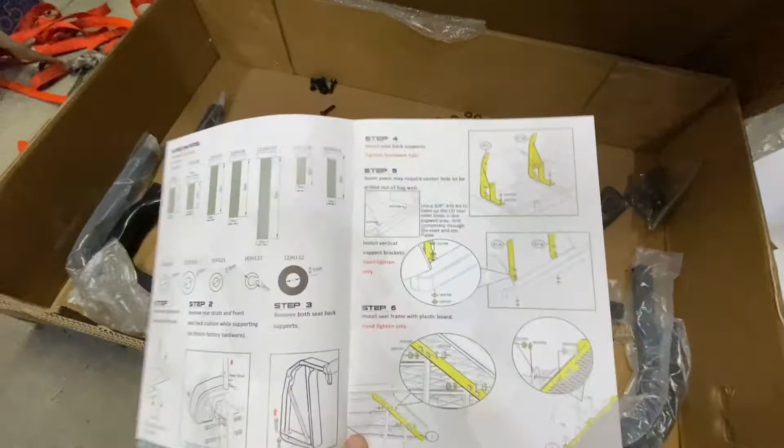Well, I'm far enough along sorting through all the bolts that were laying in the box and can at least get started on putting the rear seat kit on. So I went through the checklist of hardware and got them sorted into piles. There's a couple extra of some that don't even match what's on the chart.

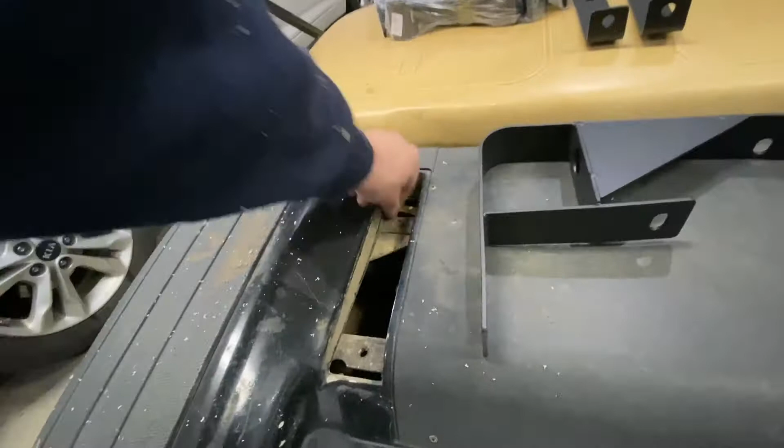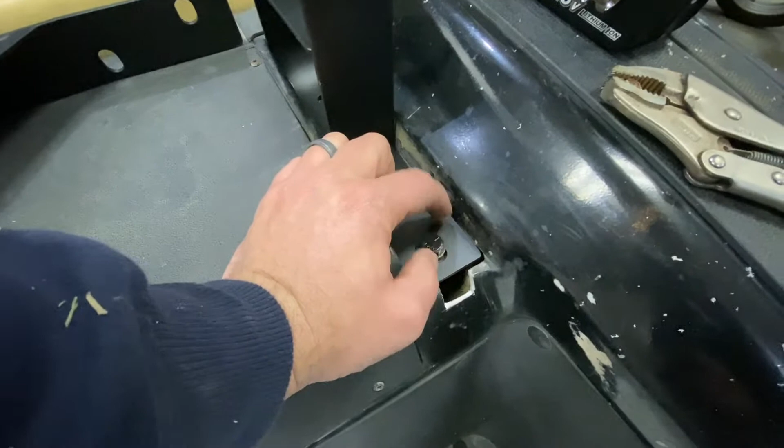And I mentioned in one of my previous videos that I've got a problem with one of the mounts for these backrest supports. There is no threaded hole in the chassis. So you can see, like in this guy right here, there are threads in the hole. Same in that one, threads in the hole. This one here had nothing. Usually if it strips out, you can kind of tell that there were threads in there. This had nothing at all. So I don't know what happened to that hole.

So what I did was I just notched out a little piece of the body here. Now this will all get covered by the seat kit. I didn't want to have to do this, but I also didn't want to have one of these supports being loose, because that would bother me worse than putting this little hole in here.

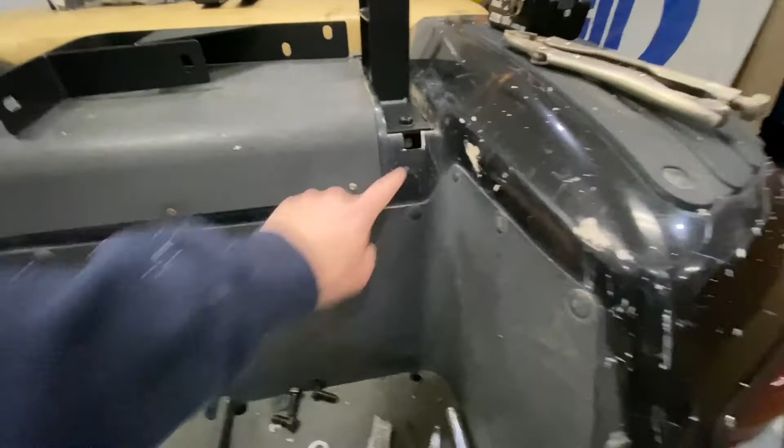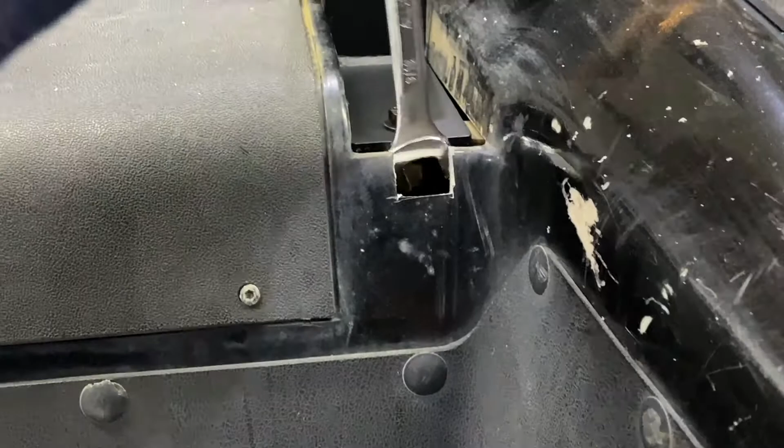So what I did was put a nut. I was holding it in there with my finger. So now I have a nut, it's actually a lock nut, that I can put a wrench on now through the hole. If I get it started up here and tip it down, then I can put the wrench on there so I can get that tightened down.

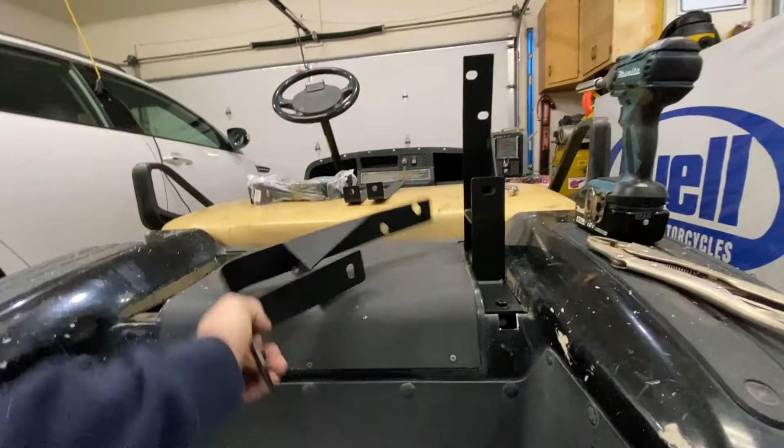So I'll get these seat brackets mounted. This is the left side, driver's side. The flat gusset you want facing out. So I'll get those mounted. Check back in with you.

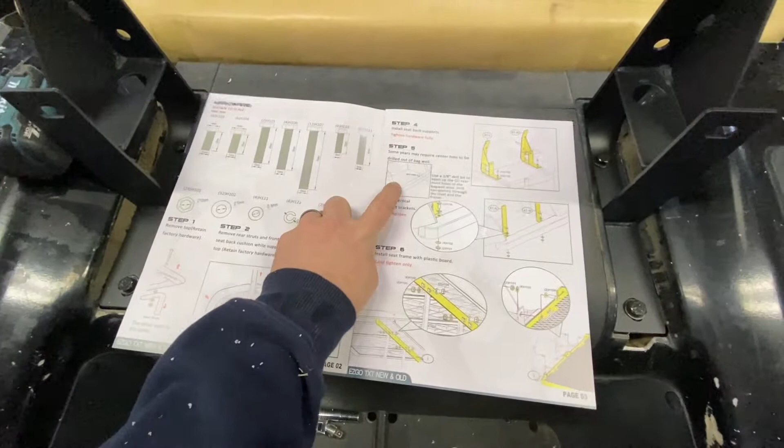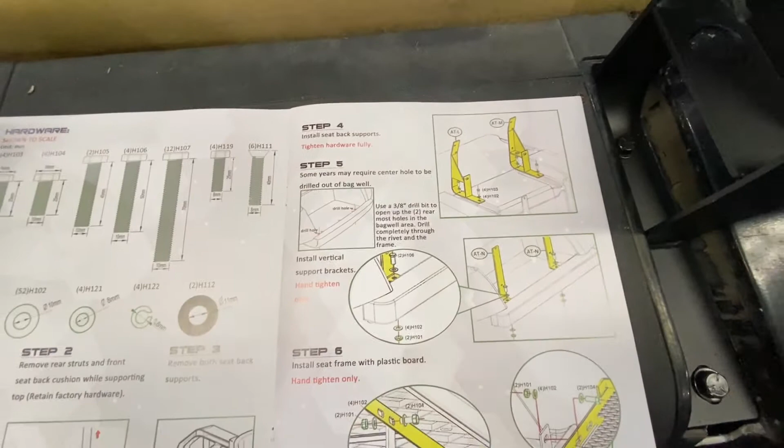Okay, step 5. We're gonna need to drill out, there's 2 holes in the bag well. They have like a plastic rivet in it, right here, one right here. It says to use a 3/8 drill bit. So we're gonna drill all the way through there, and we need H106 bolts, which I have them all laying out here, some washers and nuts.

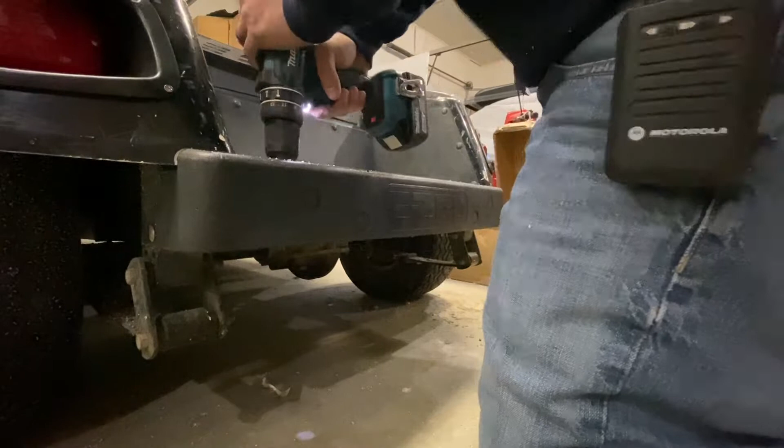So drill them out. Get that out of here. You're supposed to drill through the frame too. Okay, drill that. Holes are drilled. A little bit of crud in there.

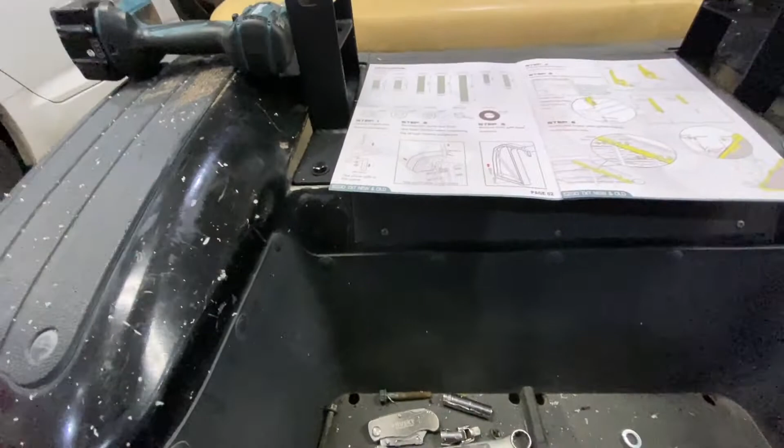Okay, I'll make sure my bolts fit. Not sure why they need a 3/8 hole. When a 3/8 bolt doesn't fit. Yeah, these do not fit. So what am I gonna do? Step it up.

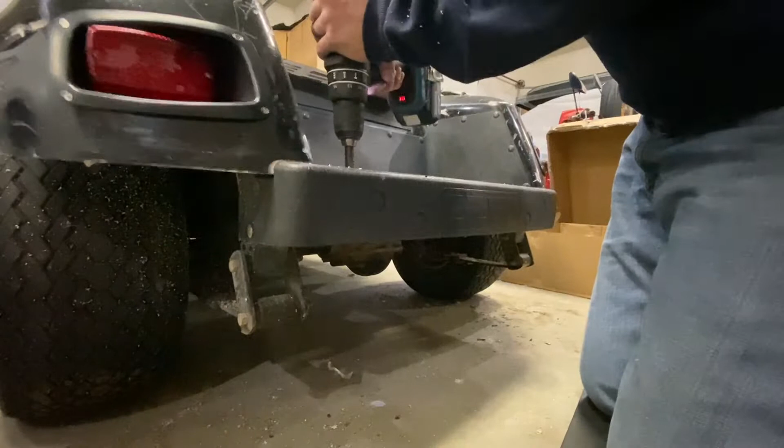Let's get my half-inch. Make sure I have something. Half-inch. Now my bolt will fit. A little big. Oh well.

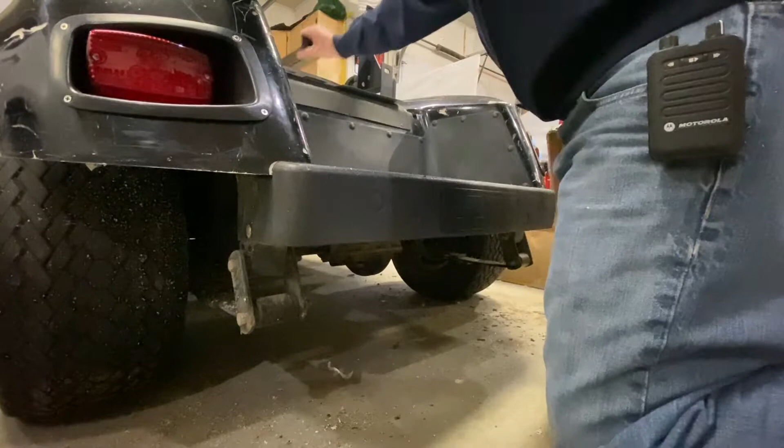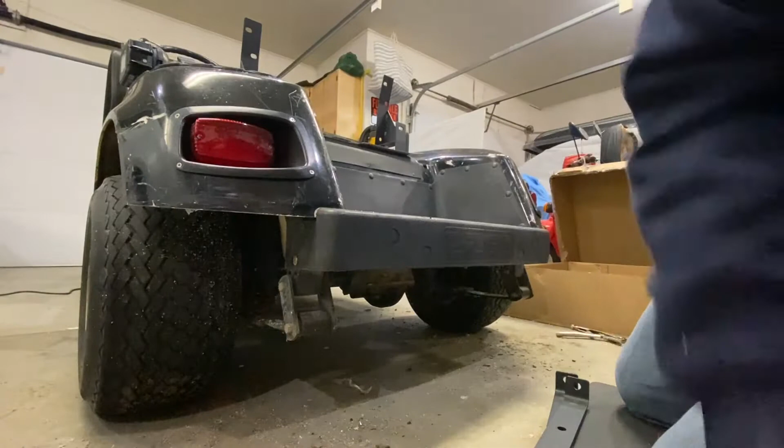This step is... let's see if I can get you set up. Yeah, looks good enough. So we're taking this bar with the bend facing out. We're gonna put that right over our hole.

We need a washer on there first. Put it through. Another washer and a lock nut.

These bolts are really long. I'm not gonna tighten this out, I'm just snugging it up, so the leg's not flopping around so much. Same on this side.

Washer and a bolt through there. A washer and a lock nut for the bottom. You want to leave these loose so you don't have to fight them and get them out to the seat bottom. So it goes right through the floor of the bag well.

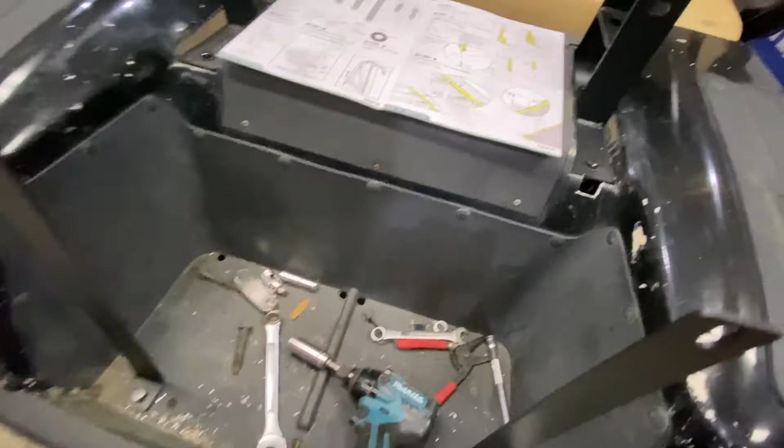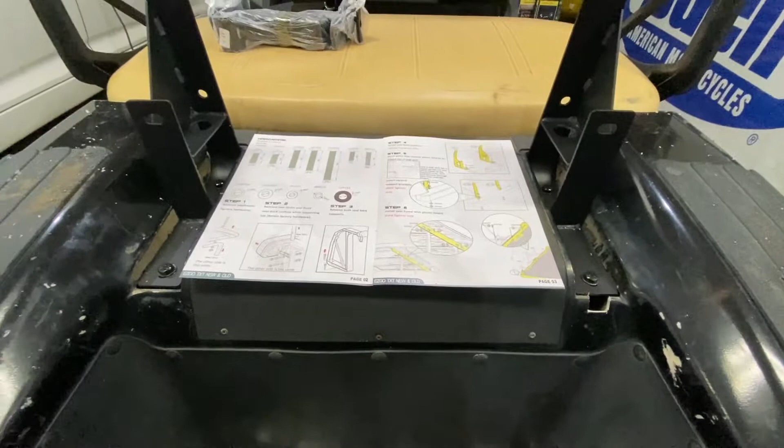And now I'll get, looks like the step 6 is you install the seat frame. So we'll get that out. Got the seat frame just resting on here. So we're gonna go with, looks like we need to put washer on a bolt.

There's a slot here and a slot out here. We're using the inner slots. And you put the head of the bolt through the seat frame first, and then a washer and a lock nut in here. Same on this side.

Just finger tight on them. And it looks like the same bolts and washers go on the brackets down here. Might be a little dark, I don't know if you guys can see it. What does that look like? Looks like you can't really see what's going on.

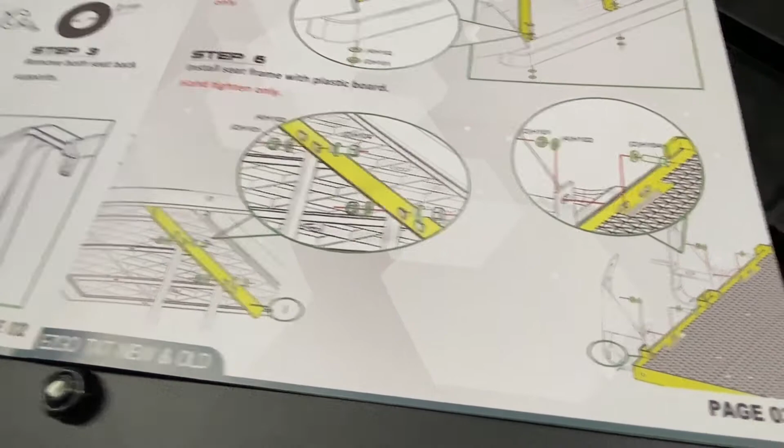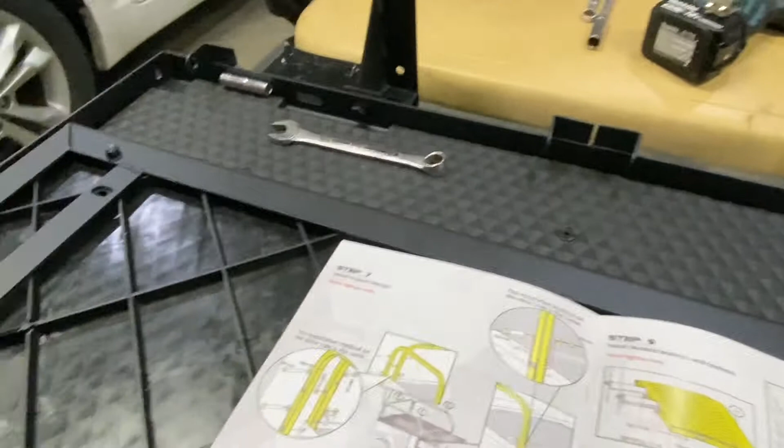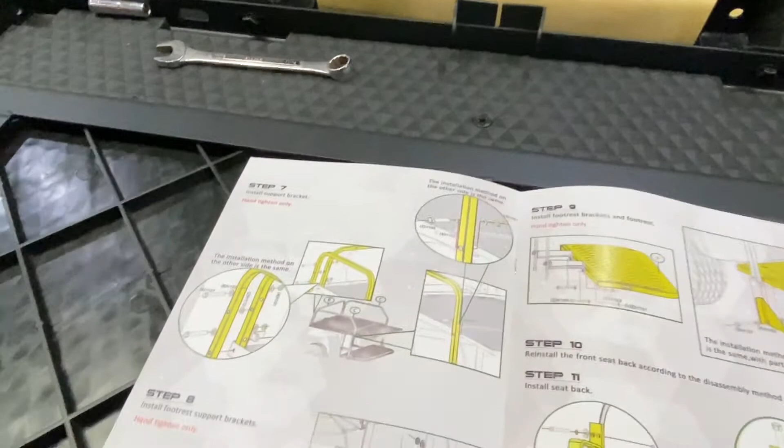Looks like I got those. On to the next step. So I need to get the hardware out for the armrest support bracket that goes like where you sit all the way down to the bottom of the step.

This is going pretty well. Actually finding the hardware okay, but I've got this arm just loosely fitted on there with its bolts. There's two through there that also holds this back support on. So everything is just hand tight, finger tight right now until we get the rest of it on.

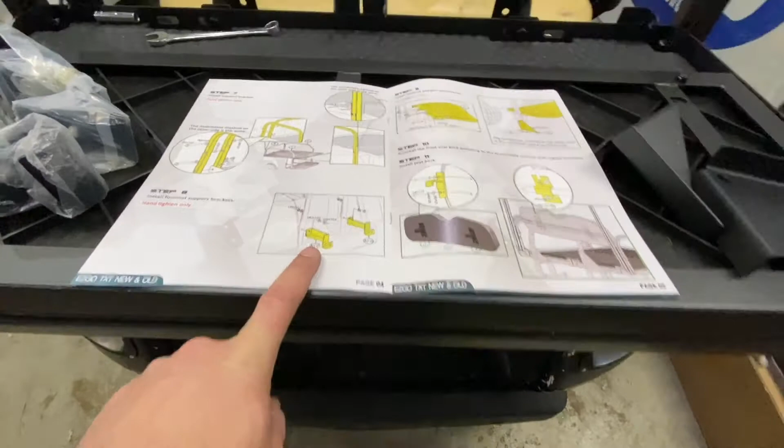Our next step is to install these brackets down here, which are located here. Those are located in here. Get this unwrapped.

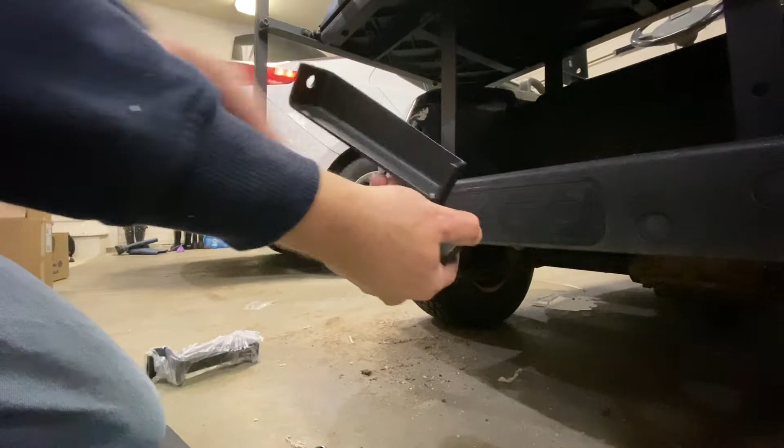Like I said, this opening goes to the outside. Got another washer on the bolt, goes through the hole there, another washer, and a bolt - or a nut, I'm sorry. And you can see how this would have been a pain to try to cut the tail lights in later once all the stuff is in here.

We still have to get the rear step in too. We just made it harder for ourselves. So washer on that bolt, another washer, and a nut. This looks like it's going to support the back of the step. That's going to be on here.

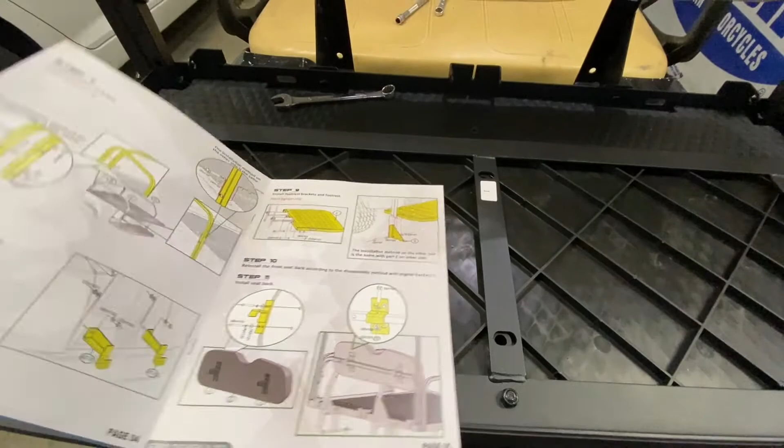Through the top, we need the 106s, which I've got 2 of them left. So I need 106s, 4 washers, 2 lock nuts. Bolt with a washer. There, washer, and lock nut.

I don't think I need to keep everything loose anymore. Yeah, it looks like I can tighten everything up that I want. So I will start with the seat back. Might be a little loud.